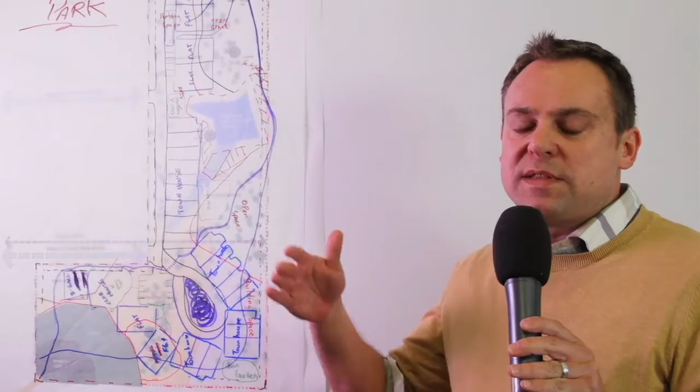So what we've asked each of the groups to do is we provided them with templates for what the townhomes, the flats, the play court, and the community center are, and to lay them out given their earlier work on the developable area map, and lay them all out based on the constraints that Jason laid out earlier in the program, with 12 flats, 20 townhomes, and then the roadway network and the utilities. And next we're going to have them each present their solutions.

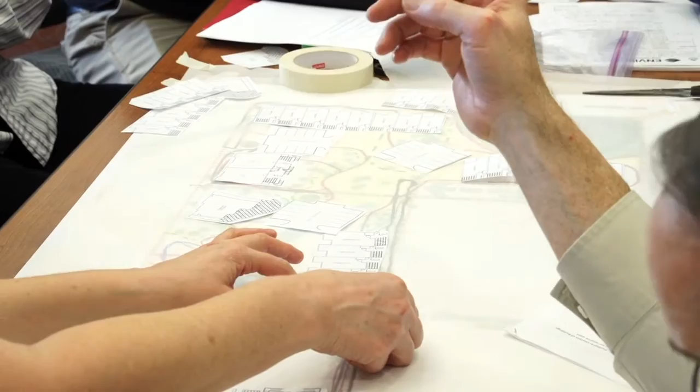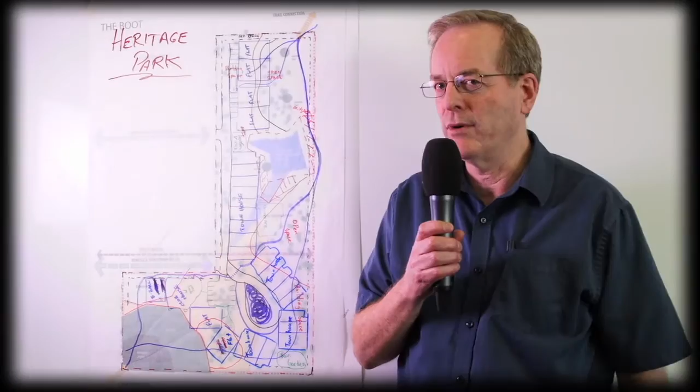I'm Craig Baldwin with West Sound Engineering in Port Orchard. We're Group 4, and this is Heritage Park, the greatest idea since sliced bread.

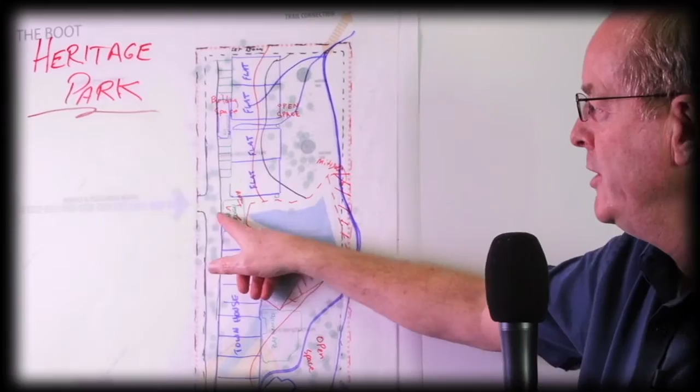We kind of started off at the north end and thought, well, flats would be a nice feature up there. So we have 8 buildings, 16 units here, and we just thought we'd have a driveway with parking right off of that. So we have the parking and the flats all in one area. We made sure this wasn't longer than 150 feet because that's an emergency vehicle turnaround criteria almost universally. And we thought, well, that just fit real well.

We have a space between them so the trail system could connect out here as well as where it was originally planned. Have a bioretention swale here, which also serves as a landscape feature and signage for what we see as the main entry into the project. And then we have a series of townhouses with the driveway and parking garages along here.

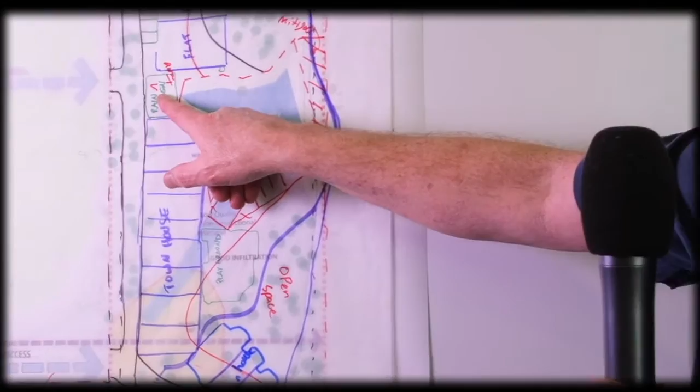Behind that, a playground. We were able to minimize our impact to this wetland. Just a little bit of impact there. It's not an impervious surface. And then again with this wetland, we've cut that off and we're mitigating behind here. So behind the townhouses, we have the playground and open space. We're able to save some of these heritage trees along here.

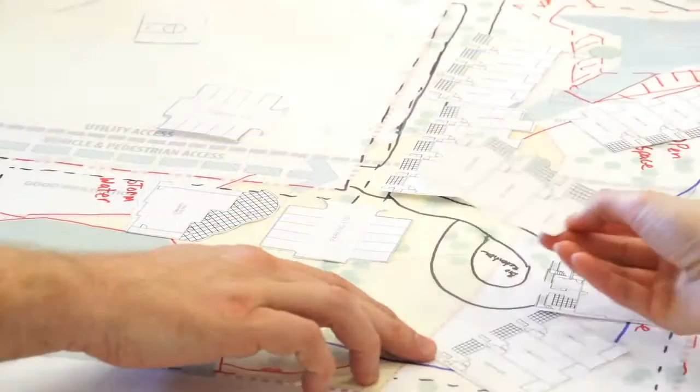We think that one can be saved, and so the trail system comes out through the open space, crosses our driveway, comes down this way like that. So more townhouses. We have a looped system here with bioretention facility or cell, whatever you want to call it. Townhomes, a couple of more flats in here. I think we can make that fit and still save that heritage tree, but that one's questionable.

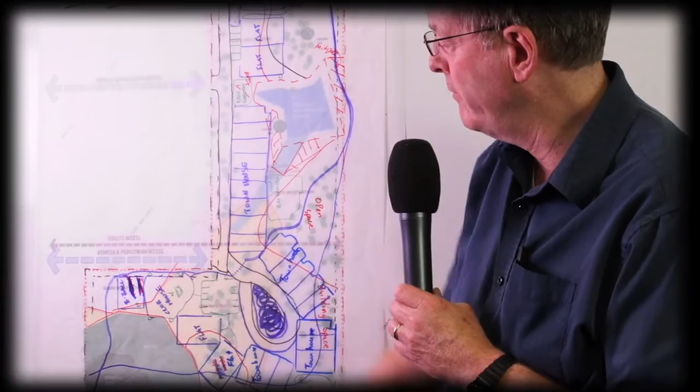Rain garden down here. Here's the clubhouse, parking for these flats and the clubhouse, basketball court behind there, and still room for some more storm drainage features if we need them for roof drainage. Probably the pervious pavement for the basketball court. We think probably pervious pavement for all of the paved areas.

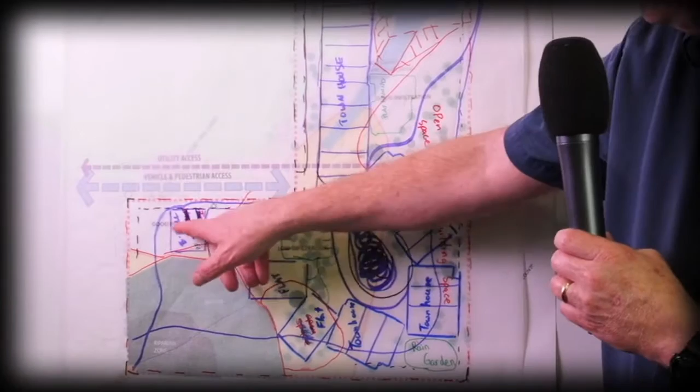Biofiltration system is part on good soil and part on not so good soil for infiltration. Envision that the overflow would probably come down this way into this feature if we needed more storm drainage mitigation. Rain garden. What we didn't show was other possible places for just roof infiltration trenches that could be behind buildings.

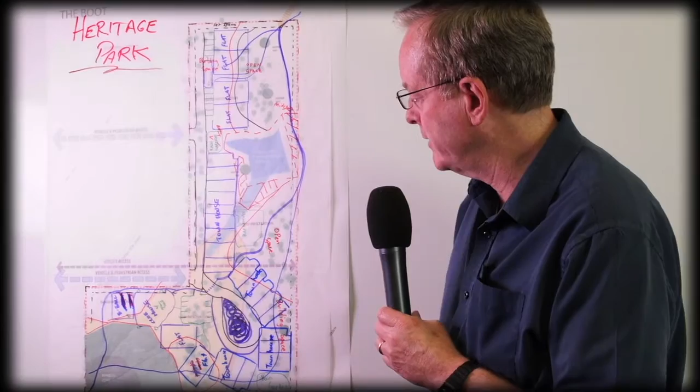We didn't really draw out the utilities, but they seemed logical to us that utilities can come in both these ways and follow the road system. And like sewer, it could drain out this way because this is relatively flat and it does fall away that way. So we thought utilities would just follow a logical course of access. Pedestrian access, the trails, no particular thing between here, but there's ways to get through and get to the clubhouse. And that's our project.

Hi there, my name's Kevin Abrams with Edge West. I'm actually a general contractor and somebody who works with engineers to try to make these kind of things happen.

I probably won't be able to afford to live in any of these units because I have to live in an apartment after building one of these things.

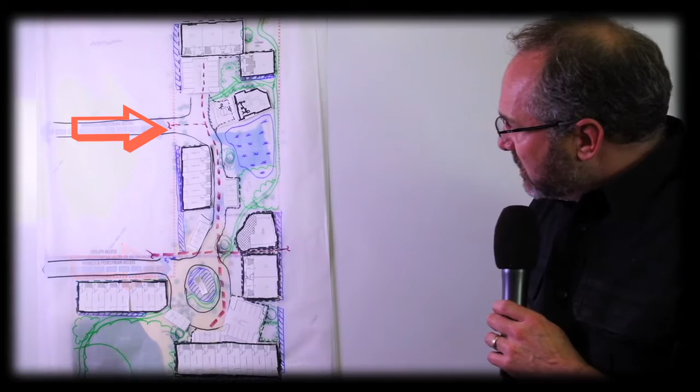With that being said, take a look here. We have 2 main ingress and egress access areas there. We do have access to these townhomes off of the main road there, but our design element, we're looking at marketability and making sure that our units can all get sold. And so we don't want to be looking across or have straight corridors. We want to have some aesthetic views.

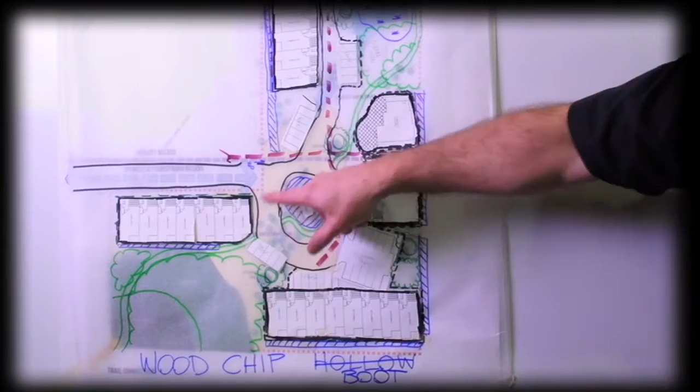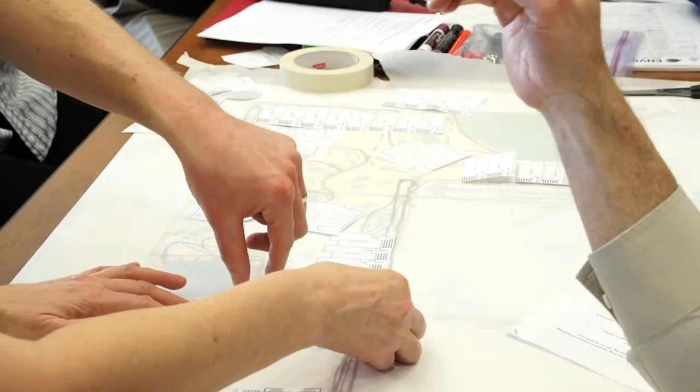A couple of our LID elements here is the bioretention system right here. We're going to have all of the road circle here grade down into the bioretention. All of our parking lots are pervious pavement. Playground and sports court are up in this area, and we chose to do the basketball court here for our emergency vehicle turnaround if needed. And also in terms of construction, we don't want to really be digging too much around the wetlands area here.

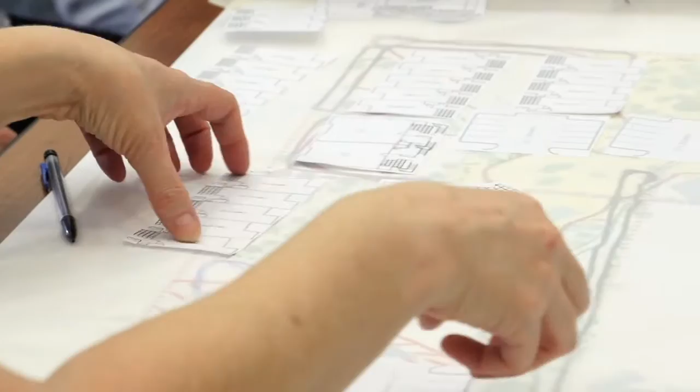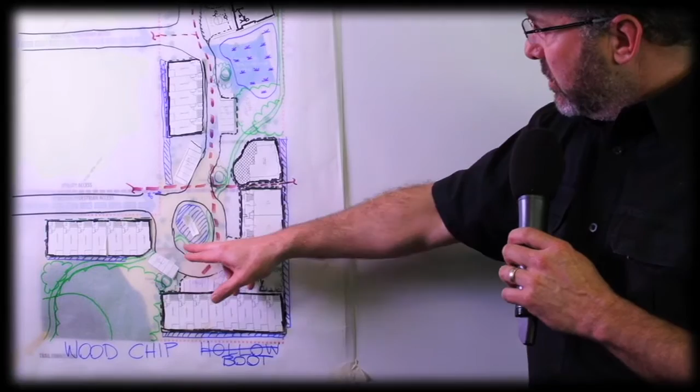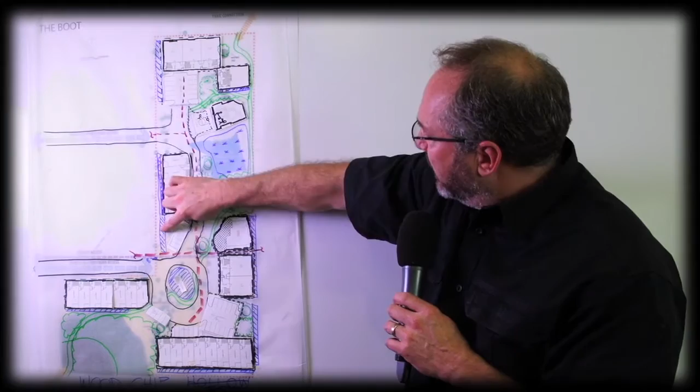We did bring our trail in across the site through the bioretention and up along the back of the wetlands. Our utilities, we did provide access for utilities across the site, but also our utilities are up and down the roads. Our bioretention cells for roof runoff, we ran along the edges of the property, right here and down through here. We don't have any retention ponds, and we're counting on our LID elements to manage all of our stormwater.

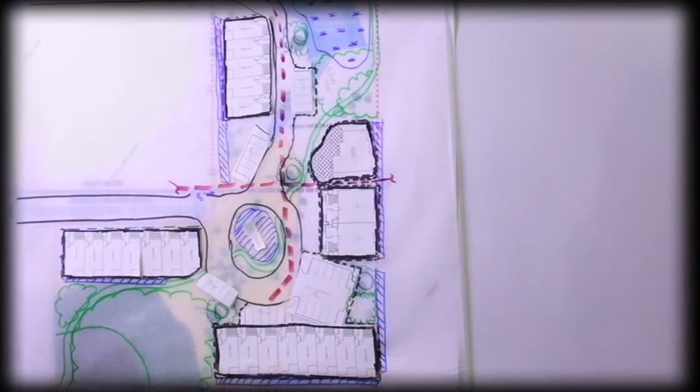This is our community center, and we wanted to have some nice green area around the community center to give individuals to come have some freedom maybe from the high density over here.

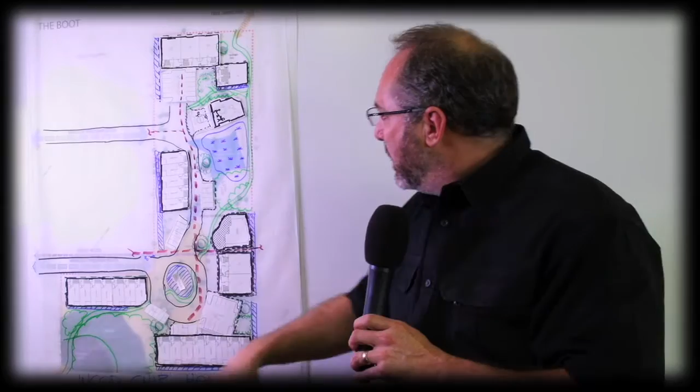We did hire an arborist because we had one diseased tree, and after getting their recommendation to have it removed, we went ahead and did the removal. We did pay our bill to the arborist. They were a bit excessive, but we got it done. Other than that, all of our heritage trees stayed. And we did try to bring in new trees to help mitigate any of the clearing that happened.

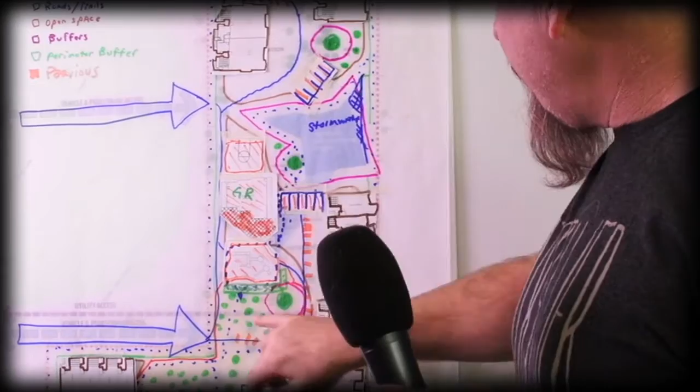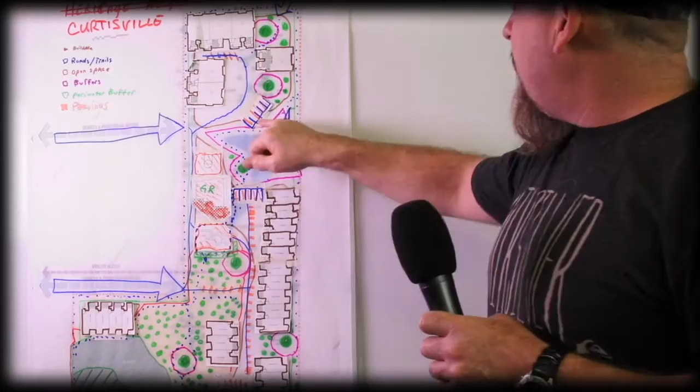Steve Downing, and I work with Kitsap County Stormwater Division, Public Works. We have our access roads in. These are the flats up here, the townhomes down in here. We tried to keep the playground and community center and basketball court kind of centrally located. Everything's connected with trails. We mitigated a little bit of the wetland area here up onto this stormwater pond up here. We have parking under each one of the units, extra parking in various locations.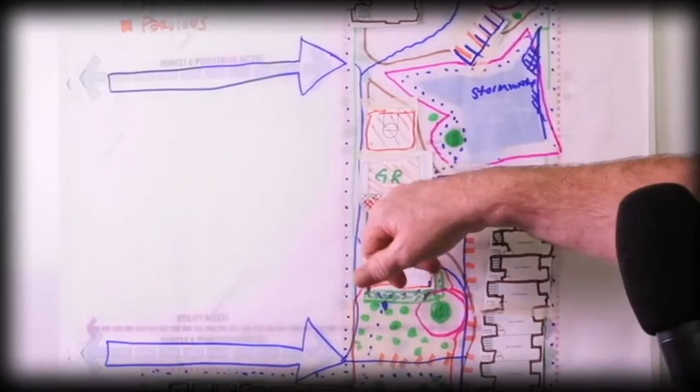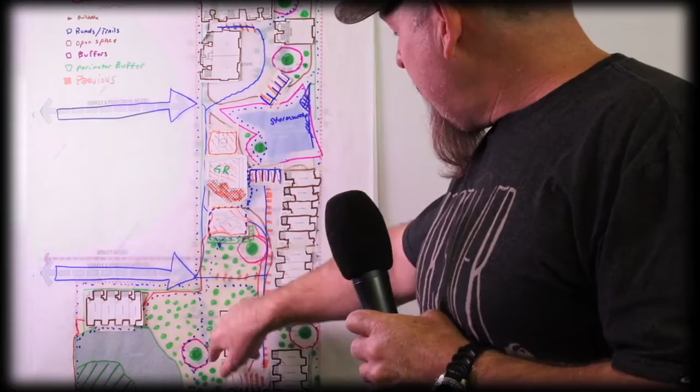All the asphalt that we have is pervious pavement. We ran all our utilities underneath the roads. We're able to keep all of our heritage trees, have a green roof on our community building, have a cistern, flushing toilets. For the trees that we cut down, since this was impervious down here, we decided to make this more of a green belt, and we added a bunch of trees for the ones that we cut down. Like we said before, the ones that we cut, we ground into bark, and that's what we use to bark the trails.

Again, my name is Dan Wesley. I'm with Land Development Consultants. I'm Dean Zavik. I'm with the City of Hillsborough. So we came up with Stovel Glen development here. Our initial approach was to minimize the impervious surfaces by creating a short access loop, the one-way access loop. Majority of the parking is actually at grade but below building, so therefore minimizing additional impervious surface coverage.

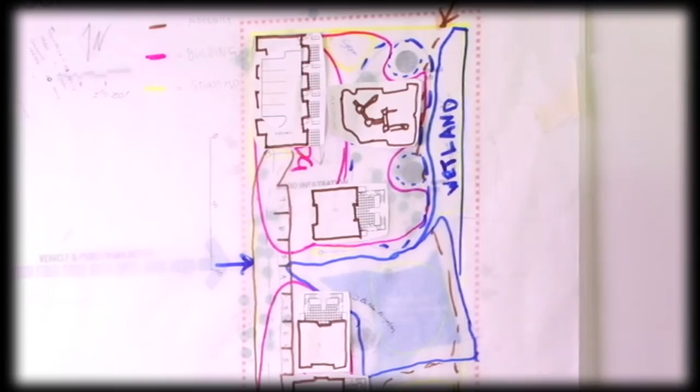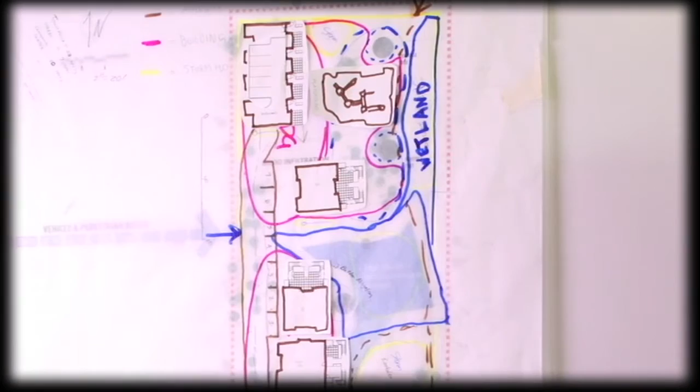From there, what we did is we also isolated this and tried to create cluster development. As you can see, the buildings are definitely sporadic throughout the site and create vegetation between the various buildings. All of the impervious surfaces as we have it are permeable pavement. You'll notice an actual turnaround here in terms of a loop, but we have some redundancy to create any overflows to a bioretention area there in the middle. 7 bioretention ponds. I don't think we're going to need a centralized storm facility. And we also have some roof downspout infiltration in between some buildings.

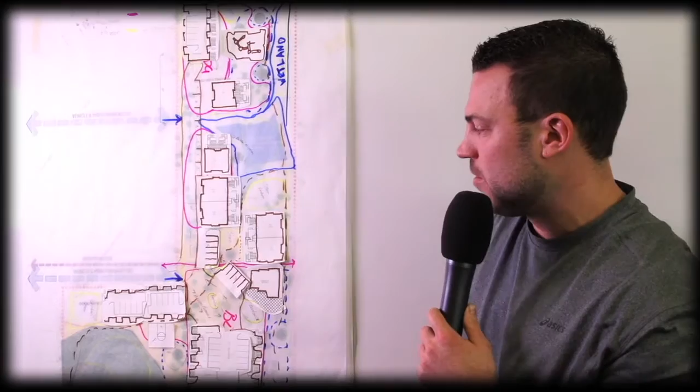Transporting pedestrians from playgrounds to the basketball court, just all the way through. You can see this is the brown dotted line going along the perimeter, and as well as intercepting here. Coincidentally, it looked like from previous discussion, we actually were able to arrange this utility crossing and access across the site.

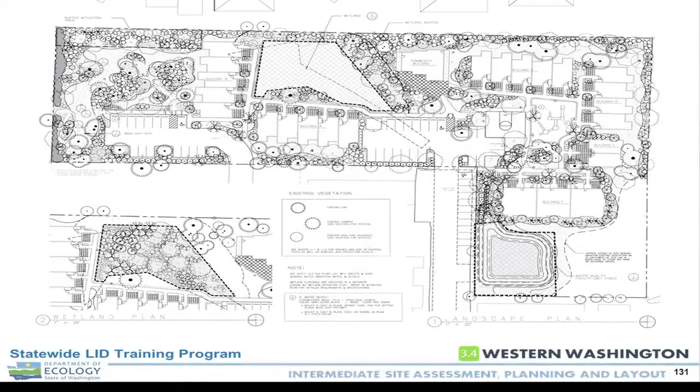If we designed this today, it would probably look a lot different, but this is an actual site that was built. A lot of the significant trees were Oregon oaks, so they're very hard to build around, and a lot of work went into both placing the buildings on the site and moving things around to fit. And again, the strategies that we talk about, minimizing the development footprint, looking at opportunities and constraints and ways to incorporate that into the site.